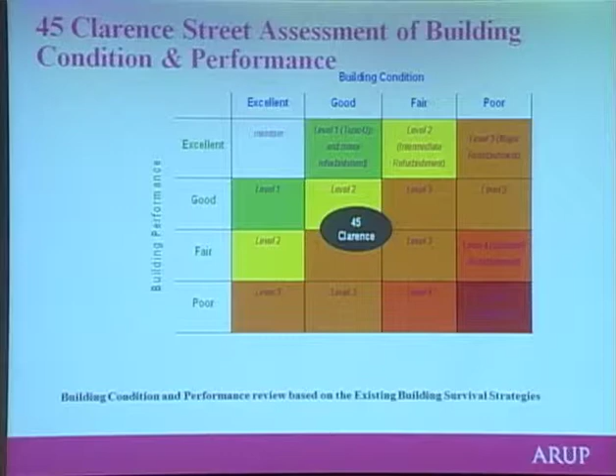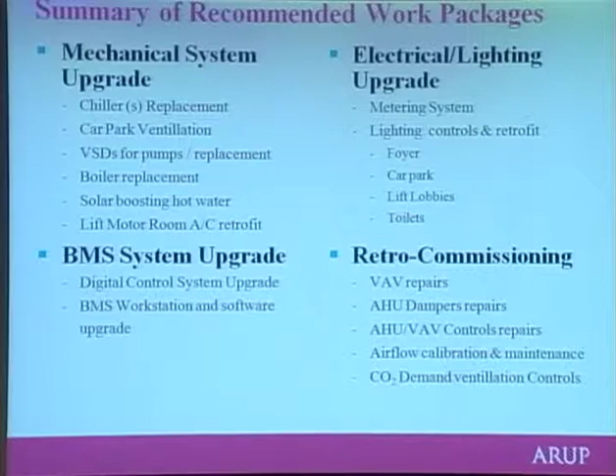When we look at these buildings, we create a comprehensive assessment of both the condition and the performance of the buildings. We look at all aspects of it, looking at ways of upgrading everything from boiler replacements, solar power, upgrading metering and lighting systems—essentially a comprehensive evaluation. For each one of these, we create an assessment of the cost of implementing an initiative, and we make an assessment of its NABERS increment.

NABERS is essentially a cross between LEED and Energy Star.

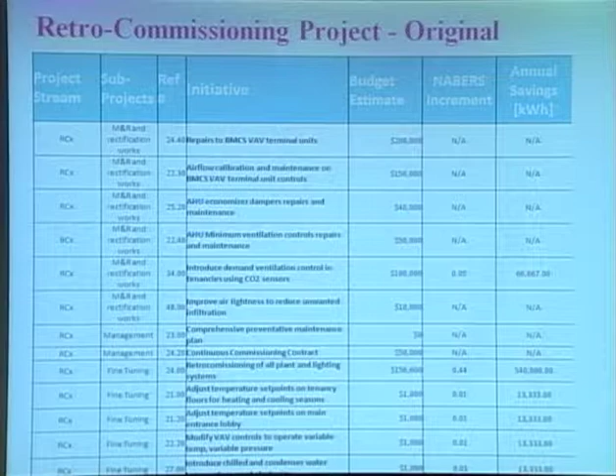So it's a comprehensive evaluation of sustainability. We look at annual savings in energy, and then we sit with the developers and work out the most effective way of implementing the retrofit for the developer. Because in Australia, like many countries that care about their sustainable footprint, people only want to live in and work in buildings that are sustainable. There is a big difference in the rent and occupancy between buildings that perform well and buildings that don't.

The wonderful thing about this process is that the outputs are in the public domain. You can evaluate and see exactly where your building stands. You can see here that we're targeting a reduction of about 40%, that's about 1.2 megawatts on this building per annum. The light blue line is our target, and we're on target to actually meet this.

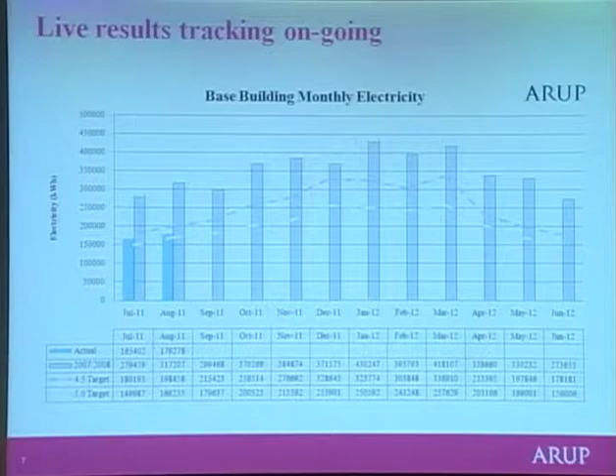The same kind of thing exists in Europe, where buildings that have low occupancy and high maintenance are essentially, developers are looking for ways to refurbish them. They cannot attract the occupancy they want to make them valuable, but modern buildings are so much better that they're looking for other ways of repurposing these towers.

Over the last 10 years, Anthony said that some of these are perhaps crazy, but actually many of them are being built. And what is very interesting from my perspective, there's a lot of Daniel's work in here, is that you can make these buildings much more efficient than you possibly think they are. You can also make them very inefficient. The best way of achieving a good design is if you can integrate the architecture and the engineering together.

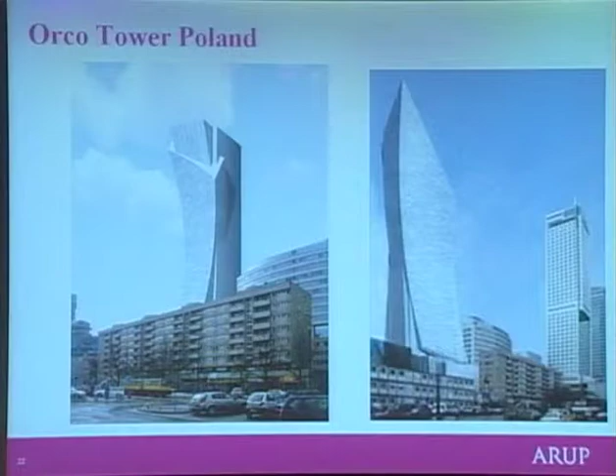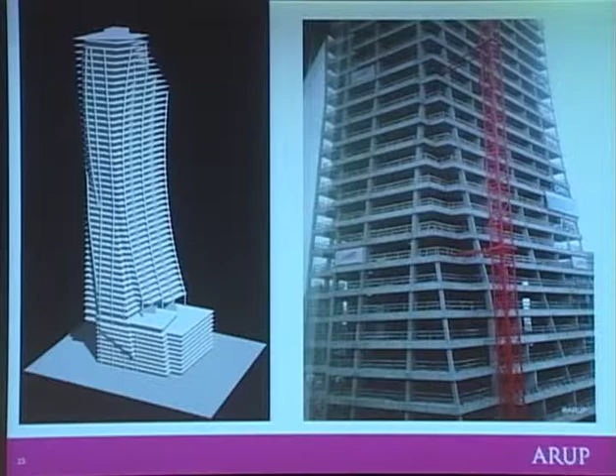Daniel just talked about this project, Złota 44, and gave an example showing some later photographs than this. But again, what is the premium that this kind of geometry costs? I think that there certainly is a premium, but perhaps it's not as substantial even as the premium between good ground and bad ground. So you have to go into these types of buildings with your eyes open, and there are opportunities.

I love this building, another one of Daniel's buildings, because of the juxtaposition of the square box and modern architecture. Both these buildings are very economic. There is very little cost premium between one and the other. And which one would you want to build? And which one is really exciting?

Because Daniel's building is essentially just a curved form. It's flat glass, with balconies that step up, and one of the walls is leaning out at about 5 degrees. Very simple to build, very fast to build, but really very dramatic.

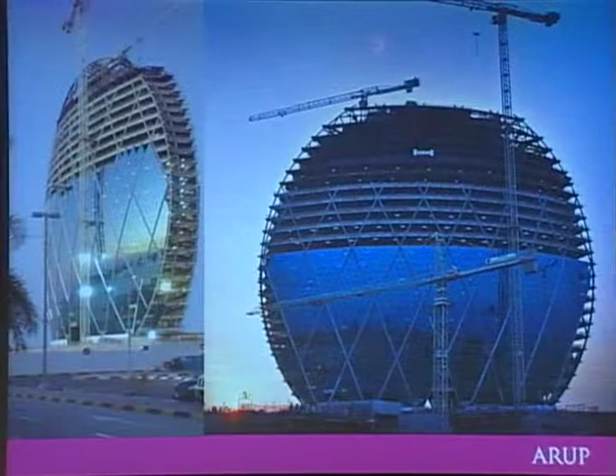This is another building that we did with Aldar. Again, it's a case of integrating design with construction. From concept to completion took 12 months. We used modular construction, dropping the modules in from the top of the building, fully fitted out bathroom units, fast and efficient.

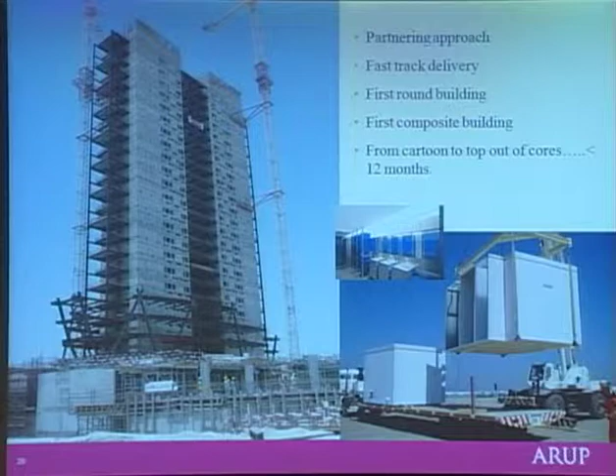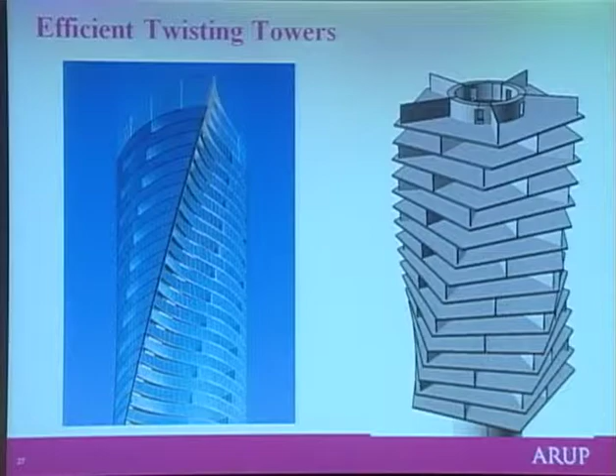This is a tower we developed with HOK. Hopefully it is the next tower to be built at Songdo. It was the one that was going to be built when the crash came in 2008. But the amount of concrete in this tower compared to a square box giving the same area is exactly the same. It's made out of flat and vertical concrete, simple to build, and hopefully this will be the next off the block at Songdo.

I'd encourage you to go and have a look at some of the work out there while you're in Korea. There are some marvelous projects.

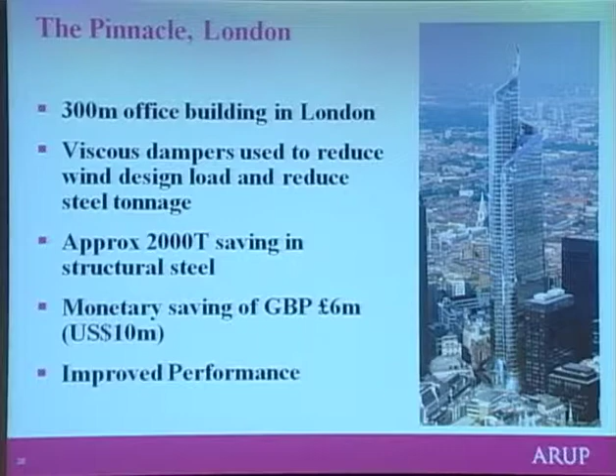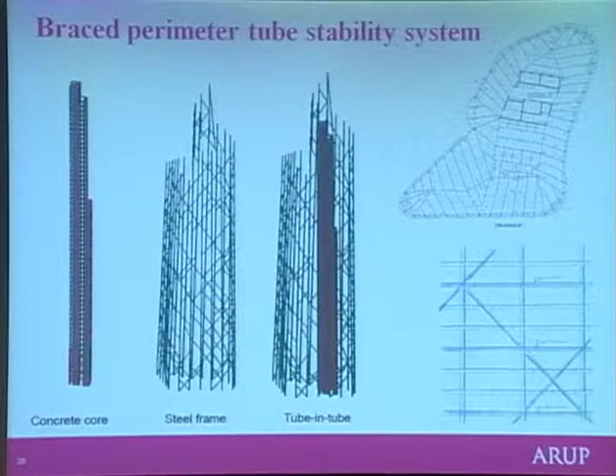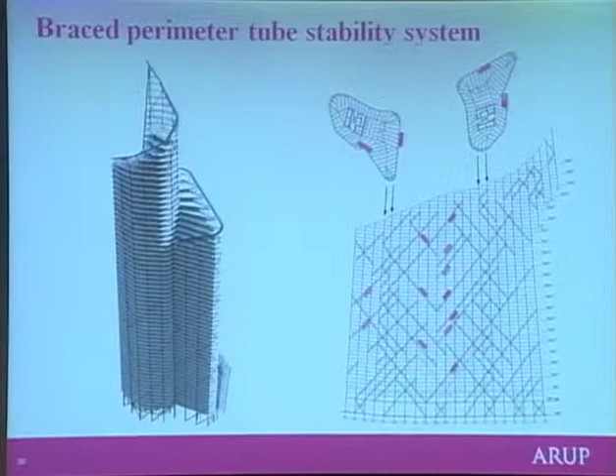I'm going to change tack a little and talk about some structural aspects. Viscous dampers are becoming increasingly visible in many tall building projects around the world. This is the Pinnacle that we're doing with KPF, a 2,000-ton saving in structural steel. It's a very complex form, simply because London would not allow a square box there—they think it's unacceptable to put that type of thing in the environment. So this whole building form is related to the place, the cities, the views and the perspectives seen from all sides. We've put viscous dampers in the perimeter wall that increase the total damping capacity. The viscous dampers reduce the wind loading the building sees and also reduce the accelerations, giving us a saving. Because we've got a large number of dampers, there's a lot of redundancy so we can actually rely on them in wind and other conditions.

These dampers don't just help tall buildings—they help any building where wind accelerations or wind forces due to vibration are a problem. This is a tower under construction. It did stop for about 2 years, it's now up to level 3, and it has recovered from the recession. It's a 40-story building, a steel core only building, and there was a problem with wind accelerations. We had an opportunity to add in 500 tons, but we didn't. We put the dampers in instead, which improved the overall performance, and we took out 500 tons. So a total saving of about 1,000 tons of steel—a big deal for this client on a small building. There are more and more opportunities for viscous dampers to improve performance.

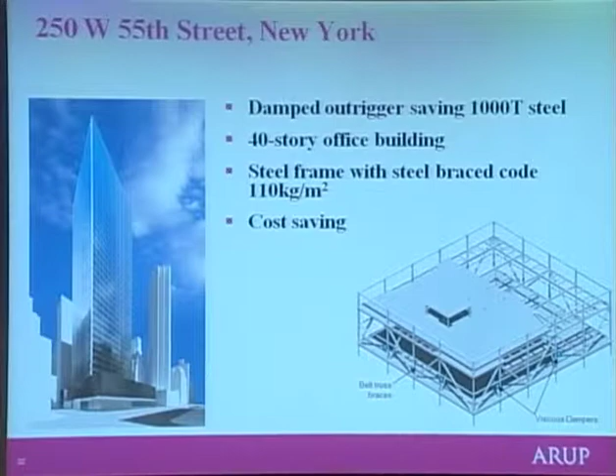There is a debate within the industry about what the appropriate damping levels are in buildings, and I hope this is something the Council will encourage its members to collect and monitor data on, because these are the measurements you can see of many buildings over 250 meters. The damping under small movements, not extreme movements, is less than 1%. I know many people are monitoring, and we'd like to encourage and see more of that.

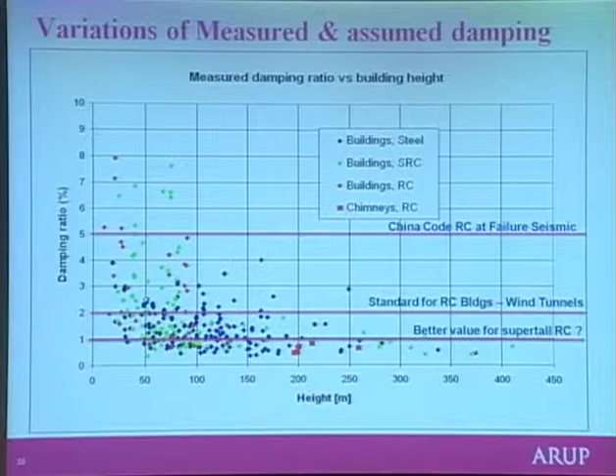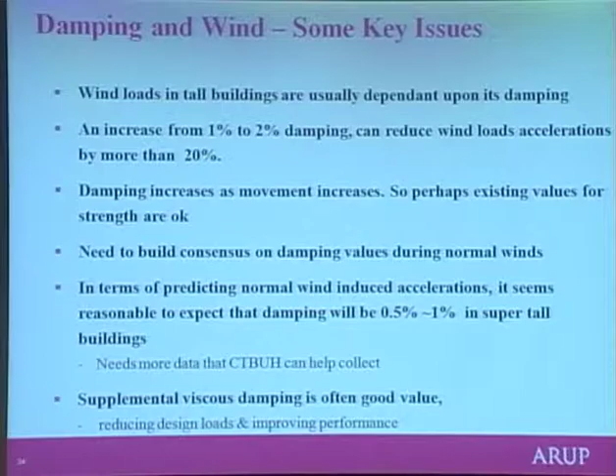Wind loads in tall buildings are usually dependent upon their damping. An increase of 1% to 2% can reduce wind loads and accelerations by more than 20% in a building we're working on at the moment. But damping does increase as movements increase, so perhaps existing values for strength are okay. We need to build a consensus, and this is something the Council can participate in.

The proportion of the shear taken by the perimeter frame was actually nominal, and special design of the core is needed in this type of condition to give the modest plastic rotation that would not have been identified by the code.

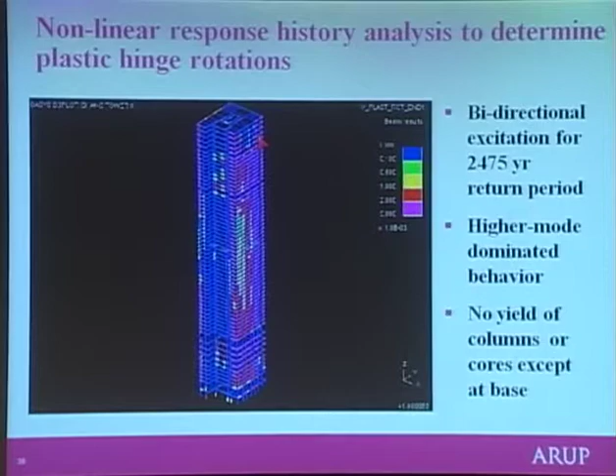This is looking at it under a 2,475 return period. The higher modes dominate behavior, and the higher mode movements are not picked up in the code design. This is one of the big issues.

So talking about diverging approaches to tall building safety, this is the crux of the things—one of the things I'm most concerned about.

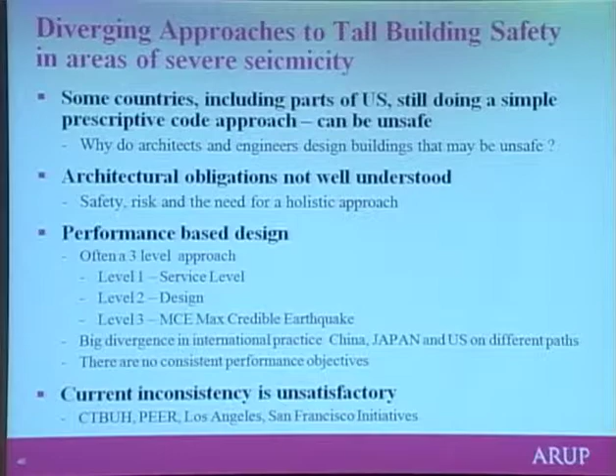Some countries, including parts of the US, still do simple prescriptive codes, and this can be unsafe. It's certainly not our recommendation. Why do architects and engineers do it? For many reasons—quite often we're asked to by developers that don't know any different. Sometimes architects or developers aren't willing to pay additional money to do complex design. Perhaps some engineers don't actually understand the values and benefits, but it is a real issue that we are potentially designing buildings that are unsafe.

Architects need to understand their obligations in severe seismicity, particularly when they're lead consultant. Both you need to understand the safety values, you need to understand what the risks are, and you need to understand that seismic design is a holistic approach.

I've seen so many conditions where engineers create something and architects then put in a non-structural wall or a concrete wall that may completely change the performance of the building, which can affect the seismic performance. So you need to be involved in the process, understand the risks, and understand the different methodologies in doing this design.

There is a 3-level approach: service level, design level, maximum credible earthquake level. And I'd like to question the big divergences in international practice between Japan, China, and the US. We're all on different paths.

The core itself is 800mm thick, with steel plate running through it for the first 300 meters of the building. If you could take 50% out of that, that's 55,000 tons of steel saving. The only people happy with this design are the steel companies—the performance isn't that much incrementally better.

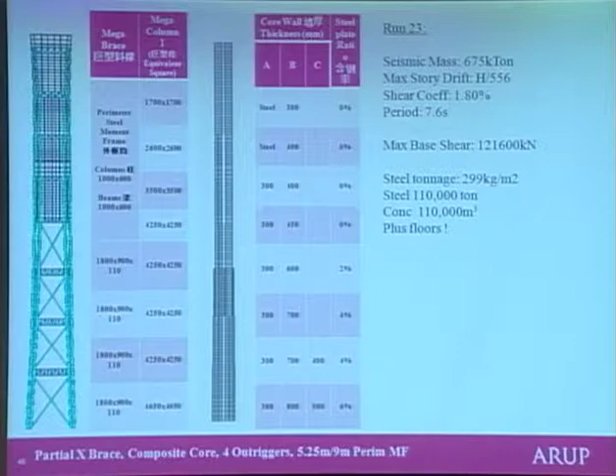That's partly why we're working within the Council to try and reconcile the performances. And it didn't work, by the way—there was still a requirement at the top for the frame to take more shear load. Dennis from TT is nodding his head on this; it's the type of thing we face all the time. It's a problem in getting economic buildings in China.

Japanese practice since 1981 is again much more severe, much more onerous, and we hope that Japan, China, US practice, Chile, and all can come together to create clearer recommendations on performance objectives.

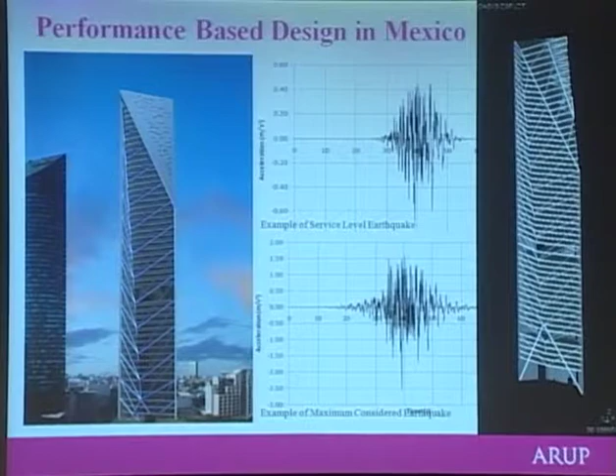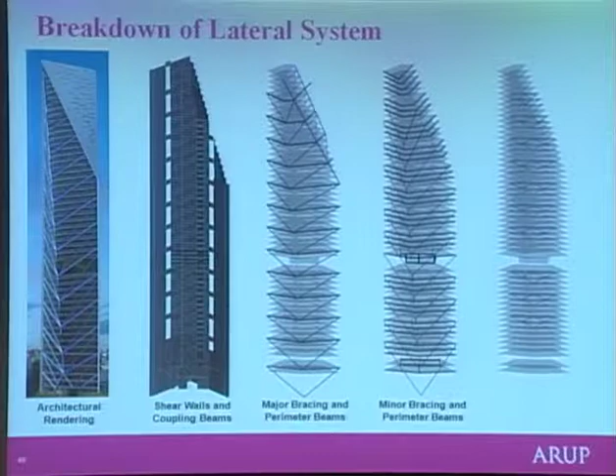But it's performance-based design that allows us to do some very interesting things. This is a tower we're doing with Benjamin Romero—it will be the tallest building in Mexico, and it has quite an unusual shape. Only through performance-based design can we consider looking at very complex buildings like this and actually get them built and designed effectively.

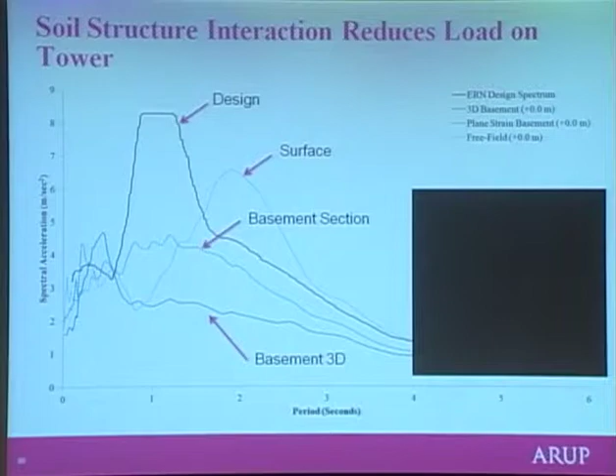But there was a significant benefit from doing a 3D soil structure interaction analysis. Mexico City has 10-story basements for parking, which are quite consistent. When you looked at the 2D effects, that was one thing; when you looked at the 3D effects, that gave substantial savings, particularly in the 1 to 3 second range.

This building has just completed its independent peer review.

What's really cool about it is underneath the building, we're doing a bit of historic preservation. We had to take this building and move it 30 meters in one direction, build a basement underneath it, move it 30 meters back, and underneath the large legs of this tower, we're going to have this historic building.

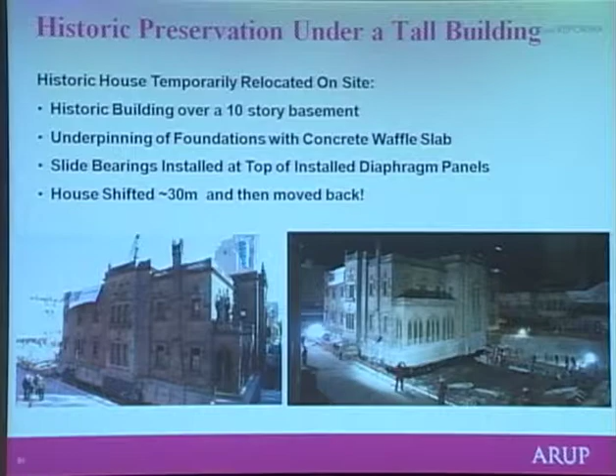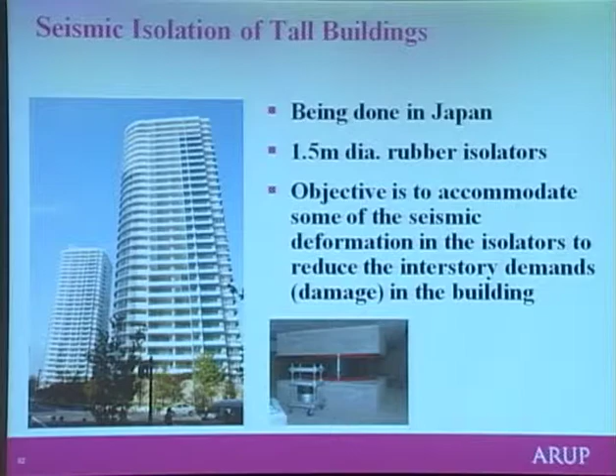Professor Wada mentioned yesterday some of the seismic isolation in tall buildings. It's not something we would ever consider here, because it's all about reducing damage. What level of damage is acceptable? Professor Wada showed some small cracks in a building and said people do not want to live in this building after these cracks appeared. That's not like the level of damage we're considering that may occur if we say a return period of 50% probability in 30 years—then we're talking about damage that may occur in 200 years, 6 or 7 times. It's an issue, and I think we need to have a consensus.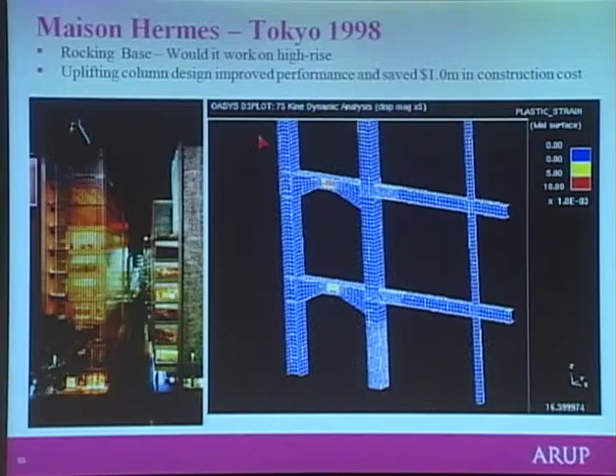We did this building in '98 with a rocking base. When we tied down the footings, we could not get the building to work. But actually, when we lifted off one of the footings, the building worked very well. So we used a damper at the base of this building, and we got performance.

We've been looking at the same type of detail with tall buildings. Tall buildings under normal wind loads and indeed seismic loads generally don't have—well, under normal wind loads you don't get tension typically in the base of the core. Under seismic loads you can get very large forces because the base is fixed. This is us looking at a way of perhaps developing a rocking system.

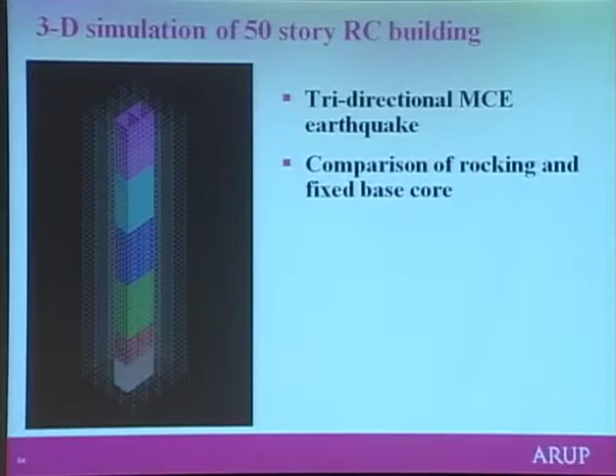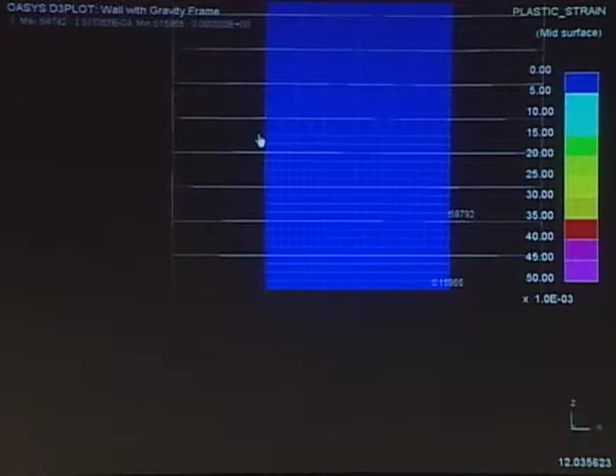Without rocking, this is yield forming in the base of this building under a severe event, and what you would do is detail it to generate yield in small amounts of movement in an effective way.

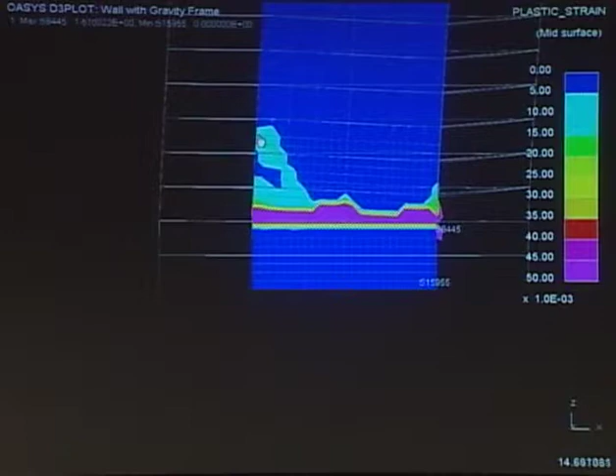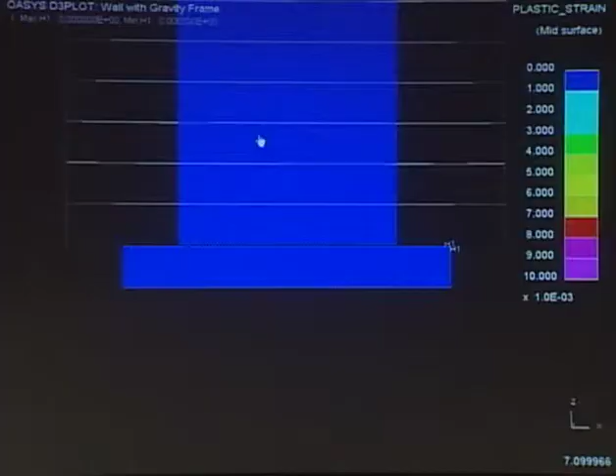This is one of the alternatives, which is rocking, under the same time history, and you can see that the edge of the core lifts off and down. This building is still stable, it's more effective, gives you a more reliable performance. There are a few details still to work out before we can go ahead, but this is the type of thing that can potentially, with dampers, give you better performance on tall buildings.

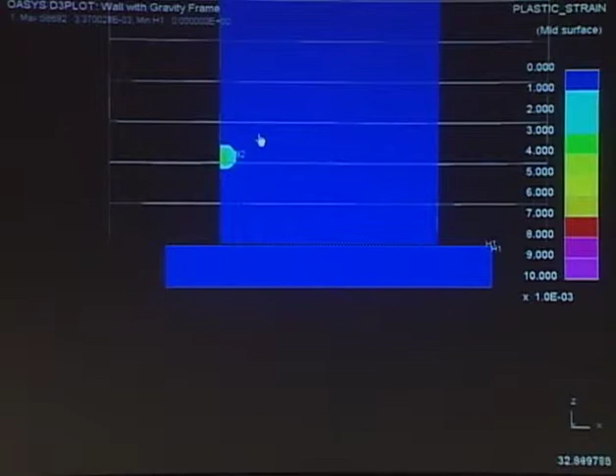So, in conclusion—and I won't talk to you about fire engineering, but the same thing exists. Specifically, modeling fires can actually give big advantages, and I'll just whiz you through the slides.

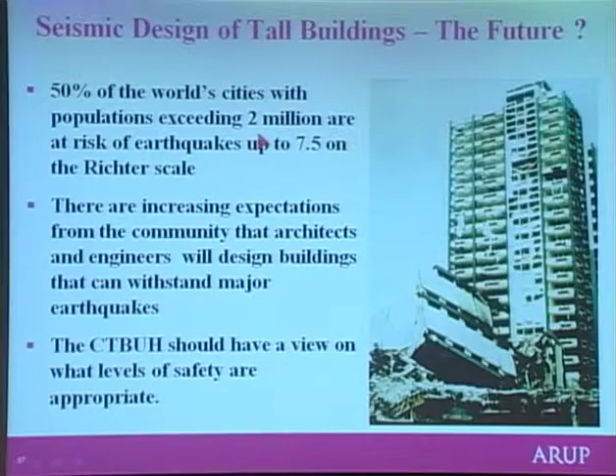On seismic design, 50% of the world's cities with populations exceeding 2 million are at risk of earthquakes up to 7.5 on the Richter scale. Perhaps the slide in the background—is that level of damage acceptable? Is that life safety? Well, people got out of it, but the loss would be devastating to people who had a building like that, because it's just going to be taken down. There are increasing expectations, and over time people's expectations increase about what they expect from architects and engineers, and the council should have a view on what levels are acceptable.

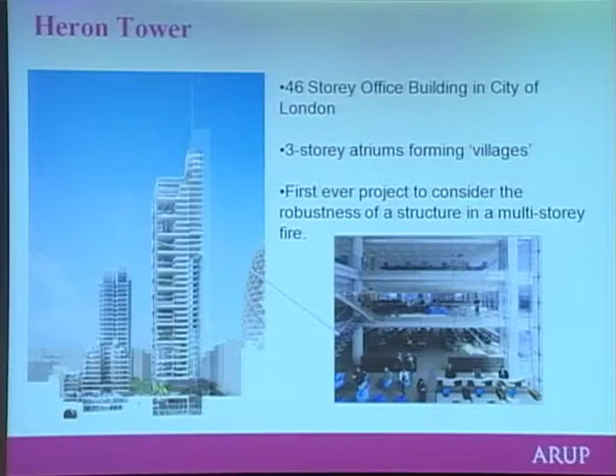The same applies to fire engineering. A performance-based approach can give you better performance, less cost. This is just some of the work—this building did not work to code. When we did the performance-based analysis, but put more fire protection on some elements, took it off others, we got better performance with less cost.

We've done this, we're currently doing the analysis on the Pinnacle, and we know that buildings like this will not perform well in fire, and we know that WTC7 did not perform well in fire either, and there are various explanations for why that happened.

Overall conclusions: performance design of extreme events can lead to better performance, less cost. It's the way to go. We have tools that can model blast, fire, earthquake impact. We need to develop methodologies that everyone can use on earthquake design—not just the elite consultants, but everyone—to get performance in earthquake zones. And we can test our buildings for extreme events before they happen. That's a big difference, and we should be testing our buildings.

We need to build up an international consensus on the performance requirements, and viscous damping—it's the way to go. There's a lot of economy there, and you'll see more and more of that in the future. Thank you very much.